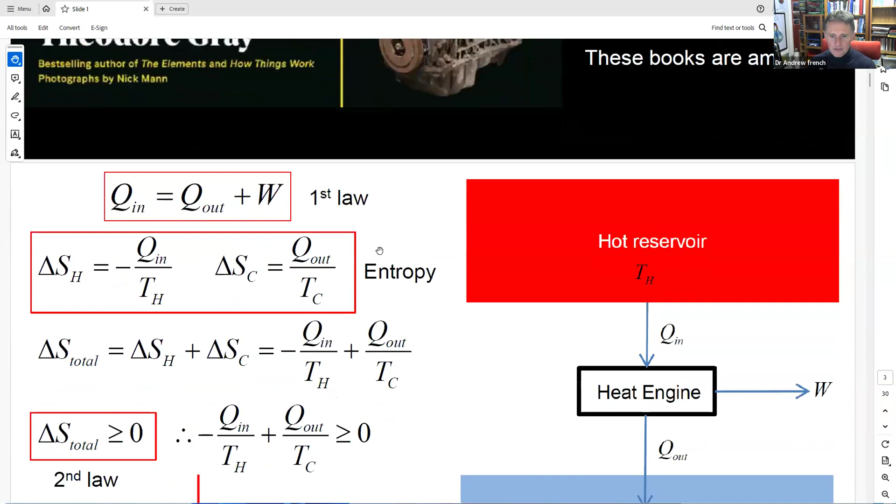Very good. Anyway, so let's have a look about engines. So firstly, some key ideas, and if I can zoom in here, let's have a look. There we go. Right, so we've got this idea of a heat engine. Essentially, pictorially, this is what it looks like. So we've got a reservoir, some sort of large quantity of, well, these days we think about it as jiggling atoms. And if we extract some kinetic energy from that, it doesn't really make a difference to the average kinetic energy of the molecules.

And that's what absolute temperature is. Temperature in Kelvin is proportional to the mean kinetic energy of molecules. That's one of the big ideas that relates thermal stuff to things like mechanics, like half mv squared for kinetic energy. So that's what a reservoir is.

So we've got a hot reservoir somewhere, and then we extract some energy from that, and we do some work, a force times distance moved in direction of force, that kind of thing. And we're going to call that a heat engine.

Now, what is that in practice? It's going to be pistons, it can be all sorts of things, pumps. But before we actually get down to the details of what an engine could be...

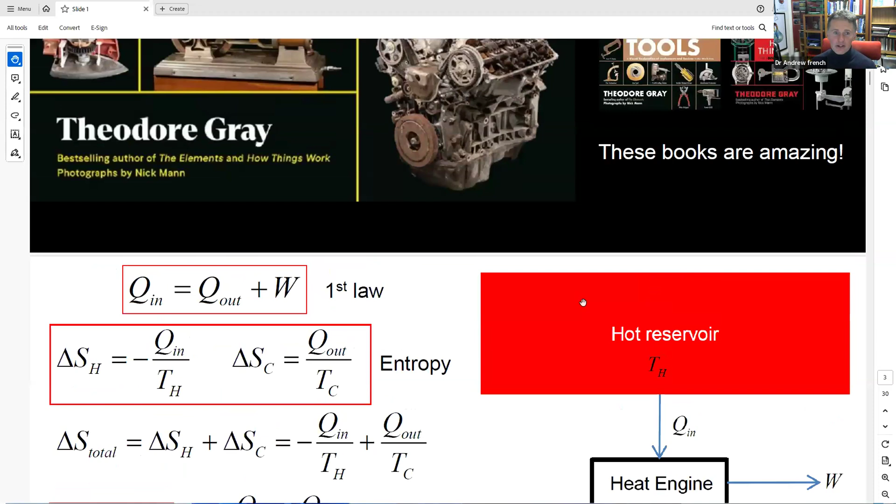These all follow, although they look complicated, similar principles. So basically what we're doing is we're taking some energy from a hot reservoir and we're doing some work with it. Then we are transferring some energy to a cold reservoir at temperature T cold. So T cold is less than T hot.

Now, you may think, wouldn't it be great if all the energy we could extract from the hot reservoir, we could then turn into work. We could extract some energy from burning stuff or however we're generating some energy. But it turns out that's not allowed, right? And the reason is because of the second law of thermodynamics.

So let's talk about some really basic fundamental physics equations here. The first law of thermodynamics, relative to this picture - one of my key nags is that you've got to define your universe. It's like in maths, really, because it is maths. You're saying, let's reduce the world to this simple problem, and the variables I define, I now interact mathematically, and I use those variables and nothing else. This is really why we start with diagrams in all physics problems.

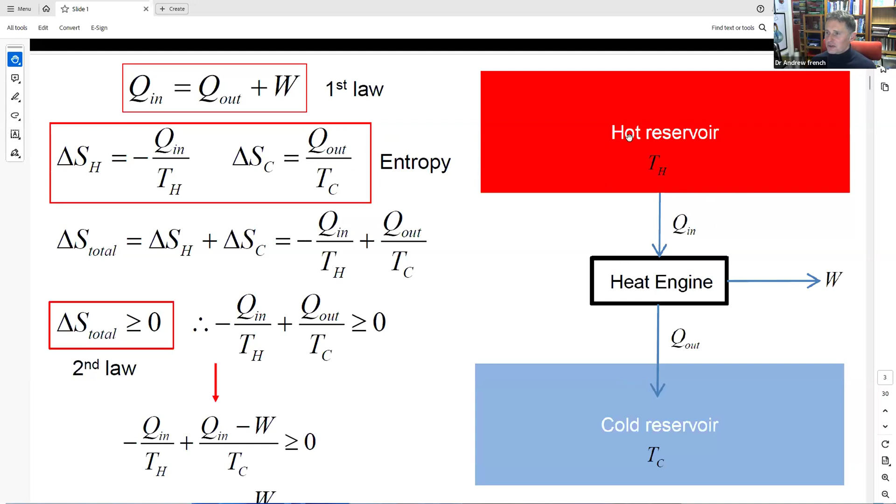So the first law of thermodynamics, that energy is conserved relative to the universe I've defined here, this slightly abstract heat engine universe, means that the input heat, the thermal energy, the total kinetic energy I can extract from my hot reservoir, is equal to the heat that comes out plus W, which is what I'm going to call the work, the useful work done. So that's the first law of thermodynamics.

Okay, now something more interesting perhaps is the second law. Before we talked about the idea that atoms exist and statistics, entropy was defined as a heat change divided by an absolute temperature. So it's important now that that's in Kelvin, not in Celsius, or certainly not in Fahrenheit. 0 Kelvin means 0 kinetic energy.

So we can look at the entropy change of my hot reservoir and the entropy change of my cold reservoir. We're extracting some heat from my hot reservoir, so the entropy change is going to be minus Q in, divided by the temperature of my reservoir. We don't need to sum it up in a calculus way because it's a reservoir - the temperatures don't change when we extract something from it. The amount of heat we take is a measly amount compared to what's available. It's like trying to take a drink from a lake, unless you're very, very thirsty, you're not going to change the lake at all.

So what we can do is work out the total entropy change of my universe, which I've defined to be this system. So if we add those two things up, we've got this little expression here.

Now, the second law of thermodynamics - and I recommend the Flanders and Swann song to explore that, I'm not going to sing that to you, but you can look at that on YouTube - is that the total entropy change for any change you can think of must either be 0 or bigger than 0. It cannot be negative, and that's the whole universe. So you can think of systems, endothermic and exothermic reactions in chemistry, where part of that system might have a negative entropy change, but it only works if the total entropy change is bigger than 0.

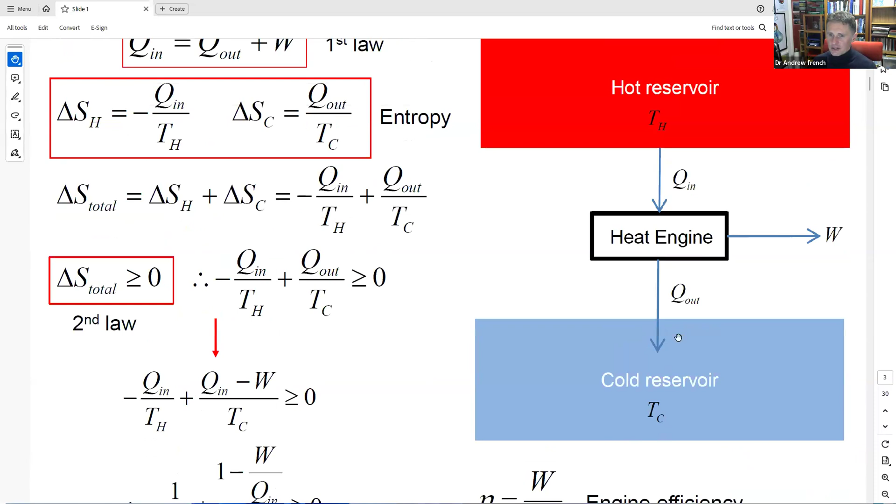But however we do it, we can't actually have eta equal to unity, because there will always be some limit, it won't be infinitely hot and infinitely cold. So isn't that cool? We've just defined this picture, without saying anything about how our heat engine actually works, but by using the first and second law, we can show that this is the maximum efficiency of any heat engine. So the next plan is to look at some real, or realistic, heat engines, and compare them to our maximum efficiency.

If you do a course in thermodynamics, this is not particularly out there. We're going to look at something called a Carnot engine, which is as efficient as it can be, but pretty hard to actually create in real life. But it will give us a template for how we might model a heat engine. Then we'll look at a diesel engine and a petrol engine, which hopefully in your lifetime will go out of favour, but sadly it all still exists these days. Nonetheless, I think it's very instructive for us to analyse it.

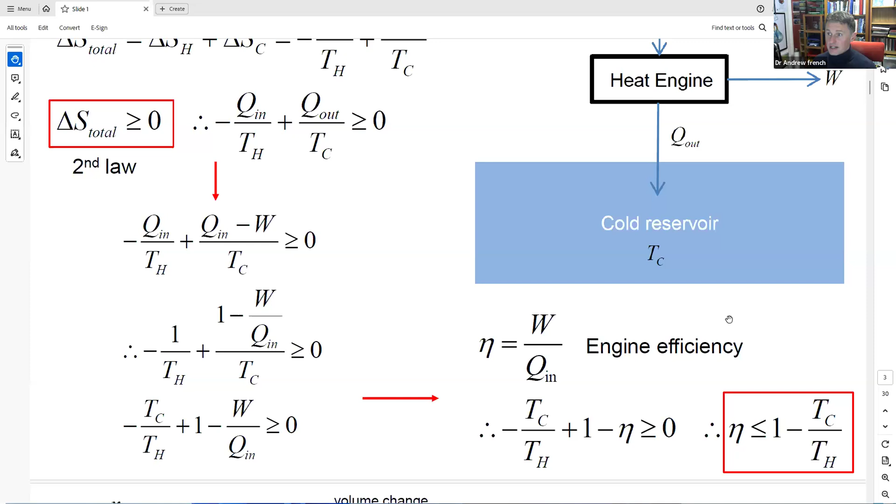Most of global trade is via sea, and that's using diesel, very efficient diesel engines. Maybe we'll have sails in the future, but at the moment it's a diesel engine.

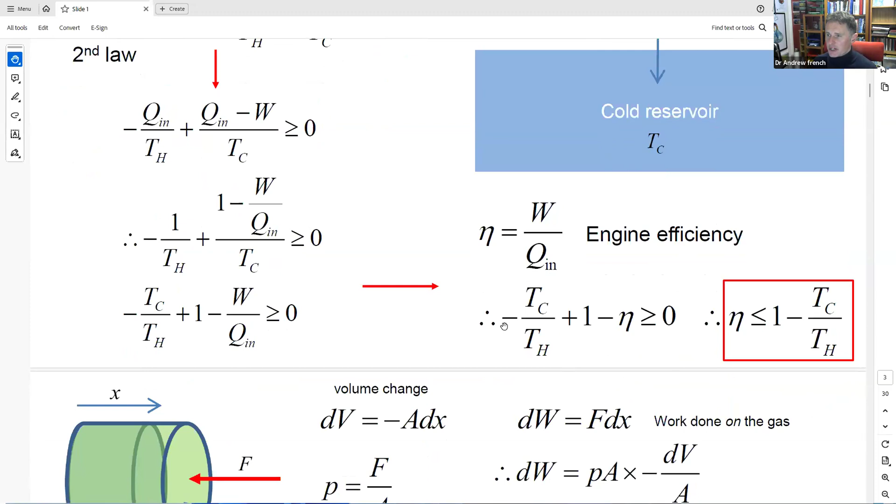So let's look at some of these. There's a bit of detail here, so I think it's important to look at the essentials, and then if you think this is a nice project for you, to code it up. I'm going to give you a tour of how this works, and every heat engine we'll look at will follow a very similar recipe. All the various details I think you could download from this presentation. Have a go yourself.

So let's get the basics first. We talked about work. When we're looking at heat engines, a practical one, we're going to talk about pistons and using gas. So it's a kind of gas model. We are compressing gas, expanding gas, igniting gas, exchanging heat with gases in finite volumes, etc. So let's have a look at how work relates to pressure and volume.

So if we've got some sort of cylinder here, we apply a force to it. My volume change is going to be the surface area, A, of my cylinder, times dx, which is my change in the height of my cylinder, which might contain some gas. So the work done on the gas is the force times a little bit of distance. Mathematicians amongst you, I know I should be using little deltas here, but I'm just going to use the calculus notation because we can make that differentiably small.

It's a small quantity. So now force is going to be the pressure times the area. And my dx will be my volume change divided by the area, because my volume change is going to be the area times dx. I hope that makes sense. So if I put that together, my area is going to cancel, and the amount of work that I do on the gas, not by the gas, on the gas, is minus PdV. So the pressure times the volume change.

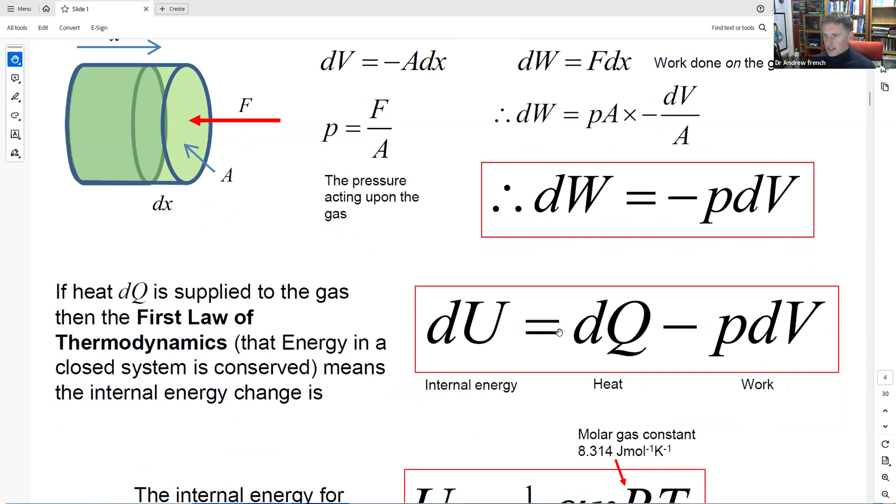Really useful idea, that. And so if we look at the first law applied to this system, if we apply some heat to it, and we do some work on it, what's the change in internal energy of my gas? Well, the heat plus the work done on it. So dQ minus PdV. If you're bothered about the minus sign, remember dV in this case would be negative, so that's like a double negative. So that's the first relationship involving internal energy, heat, and work.

And we can also relate internal energy in terms of absolute temperature. This links to the modern concept of thermodynamics, which is that temperature is related to the mean kinetic energy of molecules. We're kind of glossing over that, because there might be some potential energy too, but if we're talking about ideal gases, we don't really care about the stickiness of the gas - that's the ideal gas model. So this is pure kinetic energy.

What are the constants? Well, this is called the molar gas constant, and that's the number of moles, and then we've got some numbers in front. This might appear strange and mysterious where this comes from - I'm going to leave that story, the details, to some books and resources I can point you towards. But essentially, this is what defines internal energy in terms of temperature. An interesting mystery for you to look at is why there's a half there.

But anyway, if we've got molecules, they can move in X, Y, and Z, so that would normally be 3. But you could have stretching, you could have rotation, so the number of degrees of freedom of molecular motion could be more than 3. But for most gases, the internal energy is 3/2 times number of moles times molar gas constant times the absolute temperature in Kelvin. That's almost a kind of definition of temperature involving the mean kinetic energy of molecules.

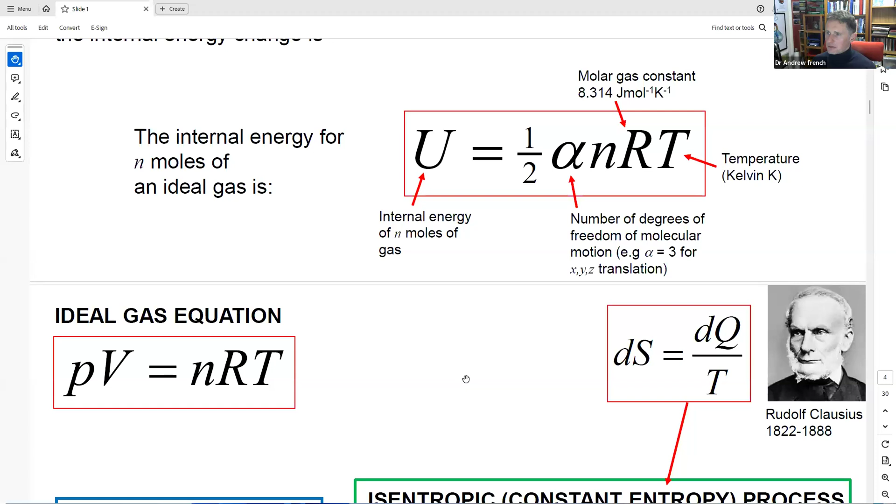All right, so we've got this idea of the ideal gas equation, and lots of you will have met this before: the idea of pressure times volume, number of moles of gas, molar gas constant, and absolute temperature in Kelvin.

So you've got Boyle's law. If you take a cylinder and compress it really slowly, isothermally, so T is the same and it doesn't leak, then PV is a constant. So P is inversely proportional to V. Fantastic experiment if you've not done it.

You could have what I did literally yesterday with my class, where we had a fixed volume of gas and we heated it up. And then we saw that P is proportional to temperature. And if you do it in Celsius, extrapolate it down to work out when P is 0, you'll get minus 273 Celsius corresponding to P is 0, so absolute 0. So you can heat a gas up in a lab and work out the temperature that your gas would stop moving, absolute 0, which is a pretty cool experiment.

So there we go, that's one ingredient. And then we've got Clausius, this is Rudolf Clausius, who defined our entropy, a change in heat divided by the temperature. So when you're looking at some heat cycles, the idea is to look at different processes where some things are constant.

So the first one usually is an isothermal process. This is when T is a constant. All of these processes, we're assuming we're not leaking any gas. We've got the same number of moles of gas that we're using in our cylinders. So for an isothermal process, we can use this equation and the first law of thermodynamics to work out a few things.

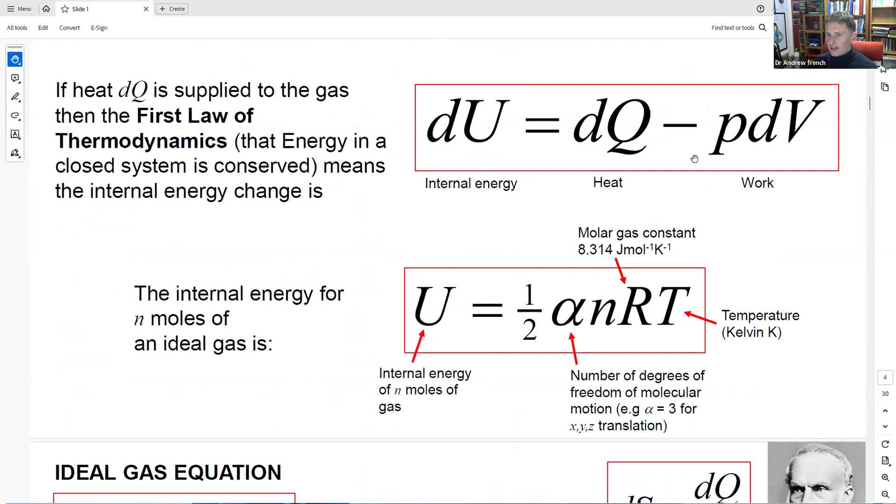And if you work out the heat change, remember it's PdV. If it's isothermal, the internal energy change is 0. So the heat change is going to equal PdV. So if we integrate that up, if P is going as 1/V, you're integrating 1/V with respect to V, which gives you a natural logarithm.

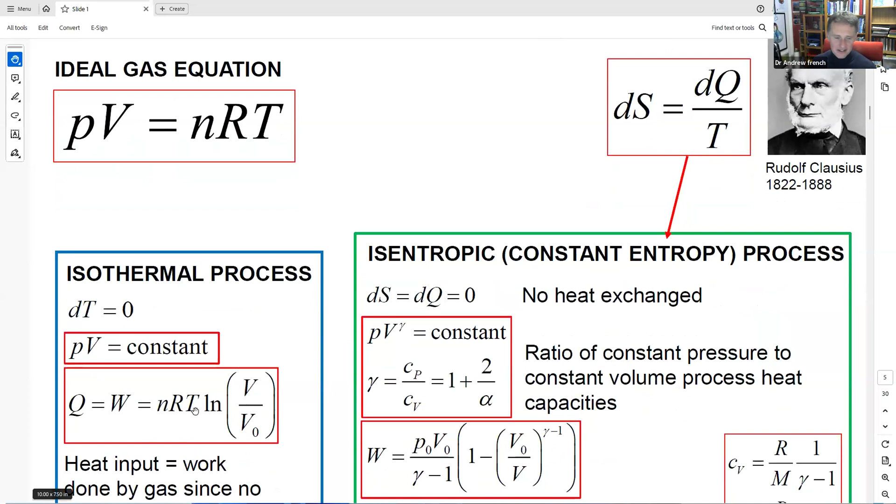Okay, so if you've not done it in maths yet, just take my word for it. But a lot of you hopefully will be nodding sagely that you've probably just done this or did it last year. So you can work out the heat change and of course the work done by the gas. So an isothermal process: we put Q joules in, and W joules is the work done by it, in that particular process.

So you're thinking, hang on a minute, surely this isn't possible, Dr. French, because we're not allowed to break the second law of thermodynamics. Well, the reason is that this is just one part of a heat engine. So overall, we might have a negative entropy change, but over the whole cycle, we will satisfy our second law of thermodynamics. So that's the formula for the heat and the work done, which goes as a natural logarithm as our ratio of our volumes.

We can look at a slightly more interesting one. This is an isentropic process, where entropy change is zero, so no heat is exchanged. That's quite hard to actually achieve in reality, but you can imagine a system where you're maybe expanding a gas, but no heat is added or removed from it. And in this particular case, it turns out you can work out that PV to some constant, gamma, is a constant. So it's not quite the same as PV is constant. And that constant gamma is the ratio of specific heats, which is, you think, heat capacity.

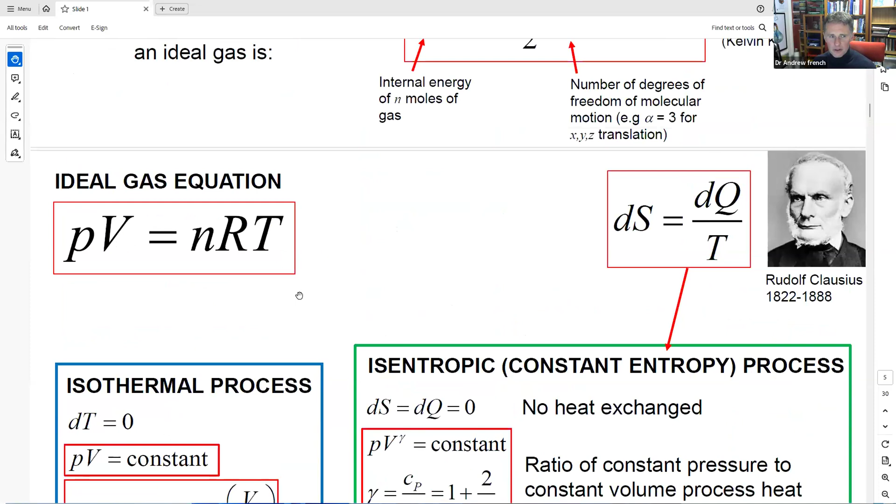So if I add some energy to something and it goes up in temperature, either at constant pressure or volume, the ratio of those constants is what this is. And it turns out it's also related to degrees of freedom. So for molecules bouncing around without any rotational stretch, alpha is 3, so 1 plus 2/3 is that ratio. And if you work it all out, just putting into this equation, there's a little bit of work to do, but you can work out an equation for the work done.

Remember, there's no heat change here. So that's, I would take this at the moment as a recipe book. This is how you work out work done, P versus V.

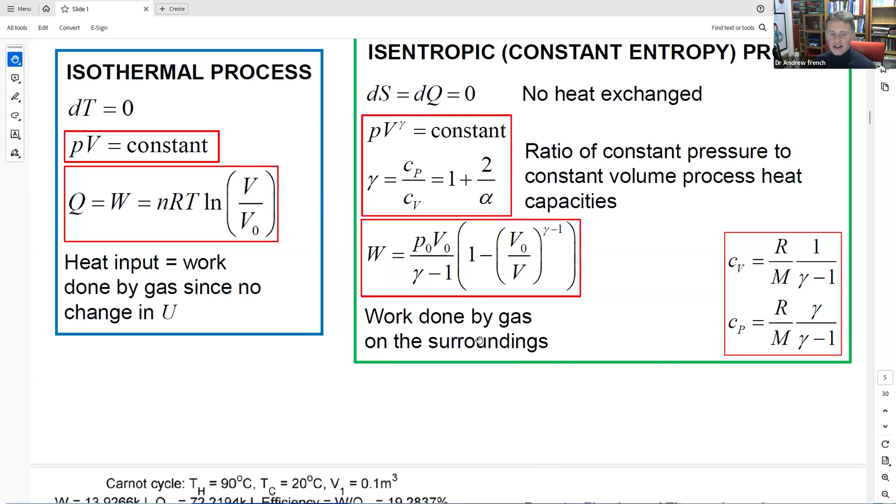Now let's put it together into a model. This is called a Carnot cycle. Let me have a look at this. So this is how I think I'll start it, actually, in a plot that might be strange.

So what we're going to do is we're going to plot, if I make this nice and big so you can just see, and I'll obscure the maths just for the moment. How do I move that out of the way? Right, here we go. Let's make that as big as possible.

So what we're going to do: this is a Carnot cycle, and my hot reservoir is 90 degrees Celsius, so that plus 273 Kelvin. And my cold reservoir is 20 degrees. And I've got a cylinder which is a tenth of a cubic meter, so fairly reasonable, sort of a 100-litre cylinder, something like that. And for this particular cycle, you can calculate that the efficiency is 19.3%, the input heat is 72 kilojoules, and the work done is 13.9 kilojoules.

How have I done this? So the first thing you're going to do is look at temperature versus entropy. This may seem a very bizarre thing to do, but it defines the processes that form our cycle.

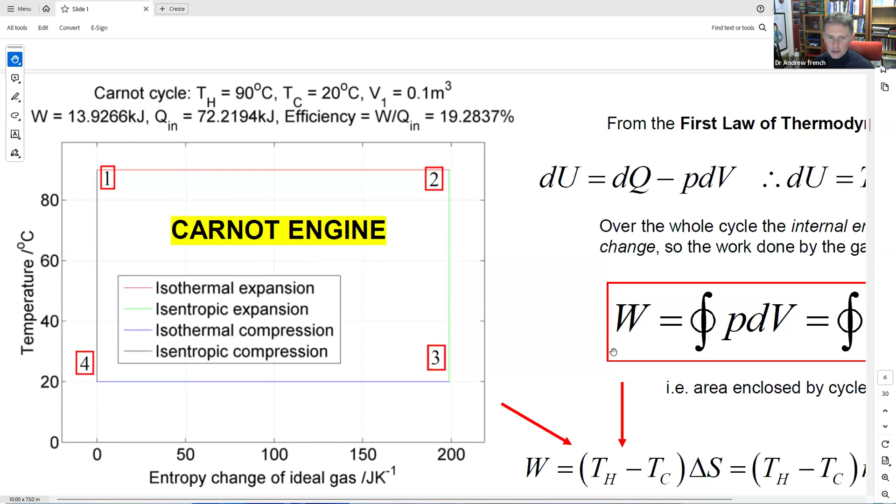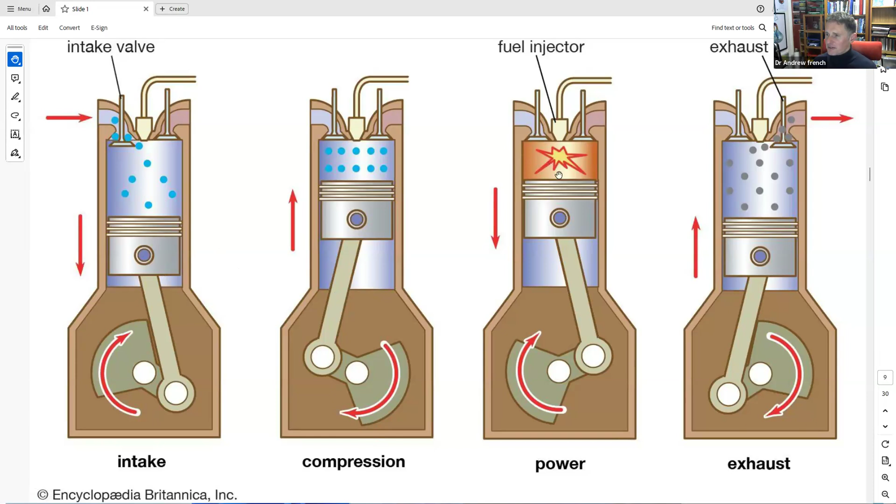So you draw in your intake, you open a valve here, air is sucked in, and then you compress it, and if it's diesel, you can press it enough so it actually ignites and releases heat. If it's petrol, you have to apply an electrical signal to make a spark, which ignites the fuel vapors, and that will release heat and explode.

And then what will happen is you'll do some work - it will expand, do some work, and then you'll actually release your heat here, release your exhaust fumes. You can draw some more air in. So I guess although the number of moles is retained, it's probably not the same moles, because you want to remove your pollutants. But essentially, it's a cyclical process.

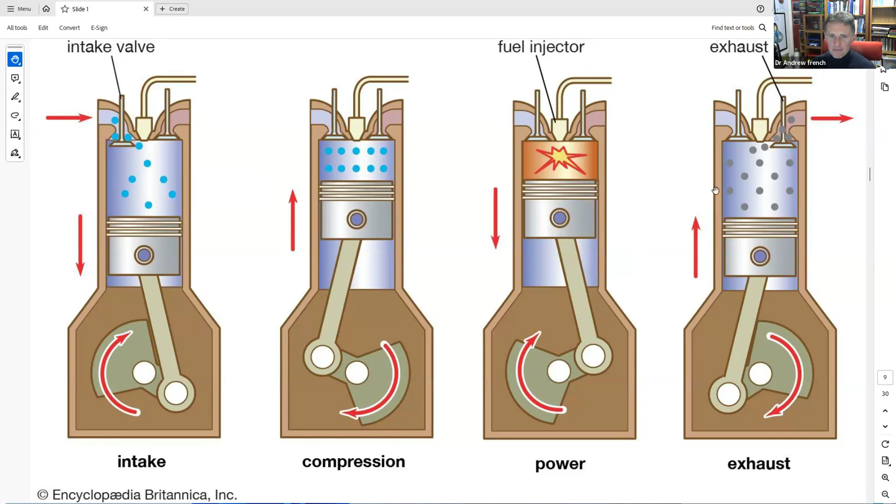This stroke here is where you do work. You're using internal energy of your fuel to push a piston, which will then drive some sort of rod, which will turn a wheel or something like that. So we need a cycle, and what we're going to have a look at is one of those.

So the Carnot engine, which is the most efficient you can do, is where we have 4 processes. The first one is an isothermal expansion. So what does that mean? It means we're expanding a gas at constant temperature.

And in this particular case, we've got a hot gas, at 90 degrees Celsius, and we increase the volume from 1 to 2. Now, then what we're going to do is we are going to expand it a little bit more, but without any heat added.

We call that an isentropic expansion, a constant entropy expansion. Now, if we plot a graph of temperature versus entropy, that's really easy to do, because if you've got isothermal, then we've got horizontal lines. And if you're isentropic, then we've got vertical lines. So without knowing anything complicated, we don't have to do any complicated maths - we could just draw a rectangle.

And so once we get down to point 3, which is now a lower temperature, we've expanded our gas and it's cooled.

So the work done by my gas is paid for, if you like, by the reduction in temperature, internal energy of my gas. And then we can compress it isothermally, and then we compress it isentropically, and then we start again. So how can we work out all these useful things?

If we have a look at the first law of thermodynamics, that's dq minus pdv. So this is where we had it before. Now, dq is the temperature times the entropy change. Remember Clausius's law, so dS is dq over T.

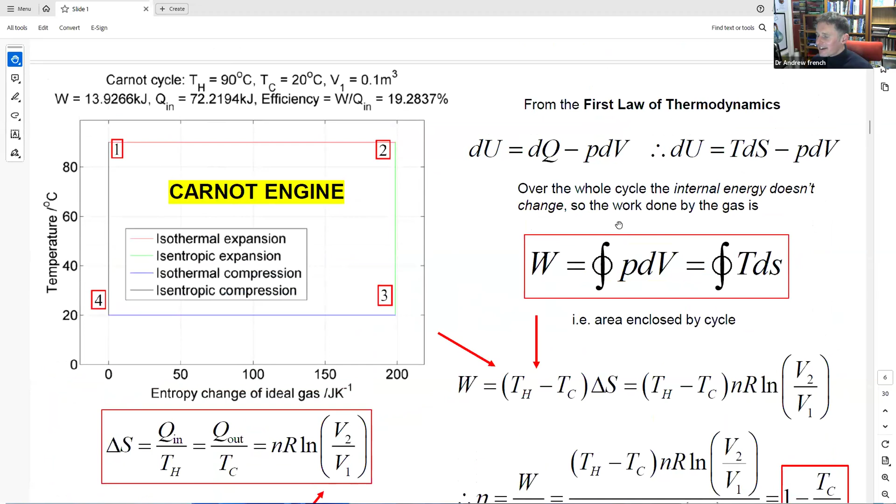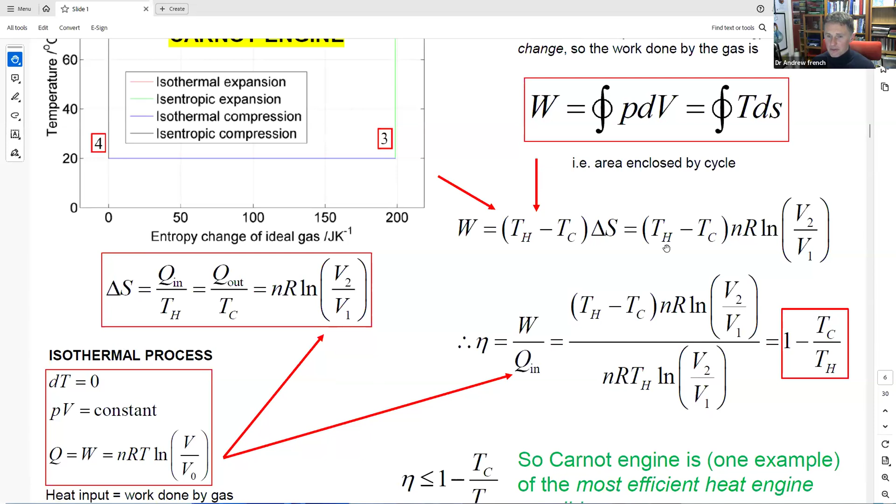Right, so you're thinking, okay, well, in terms of projects, well, firstly, for a Carnot engine, you could plot this up and you could work out the numbers in the title here. So that's working out, well, you know the efficiency, but you could do the energy change here, so essentially this one, and you could work out - so that number we've got there, if we know TH and TC, we know N, we know the volume change, we can work out these.

All right, so let's have a little look at what we might do in terms of pressure and volume. So this is what, in practice, because entropy is rather an abstract thing, this is what the Carnot cycle actually looks like. So there we are.

That's the rather dishy Nicolas Léonard Sadi Carnot in his military uniform there, 1796 to 1832, and I think we credit him for working this out. So what are we plotting? Because it's quite busy, this picture, so let's work our way through. So what we've got is the same process, exactly the same numbers, but we're starting off at a certain pressure.

Okay, so what's kind of hidden from this, and perhaps I should have in my title, I need to start off with what that pressure is. So I'm starting off at, say, just over 10 atmospheres, something like that. What I'm going to do is go all the way down, so that the graphic shows pressure versus volume. I'm plotting this as volume divided by the initial gas volume. We need to keep track of what our inputs are and what we can calculate.

So this red line is an isothermal expansion, constant temperature. And in order to get it to expand, we've got to put some heat in. The heat input basically increases - if we expand it isothermally, our internal energy must remain the same. So basically heat input accounts for all the work done in expanding this thing.

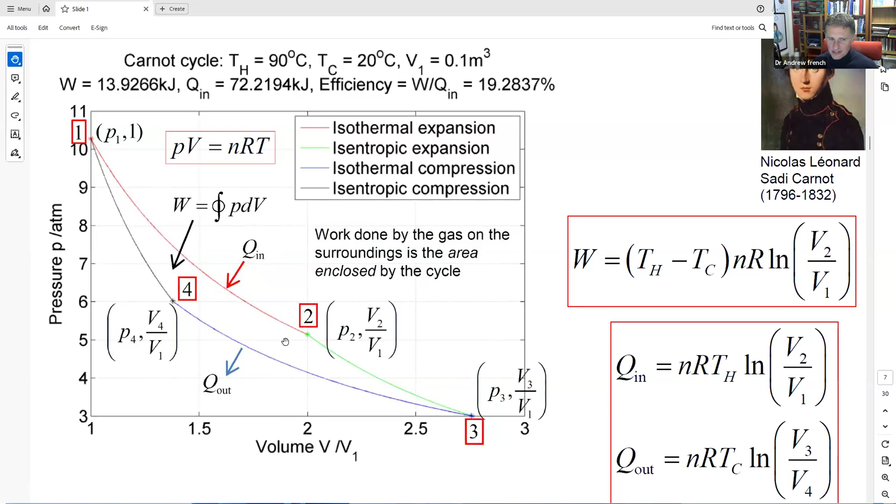So the idea is you want to work out what the pressures are, what the volumes are at all these points, and we've already calculated the heat exchanged and the work done, which is the area under this. That's quite nice, because that sounds like a horrible thing to work out, what the area under this sort of shape is. So that's why plotting it in temperature versus entropy space is a much better idea.

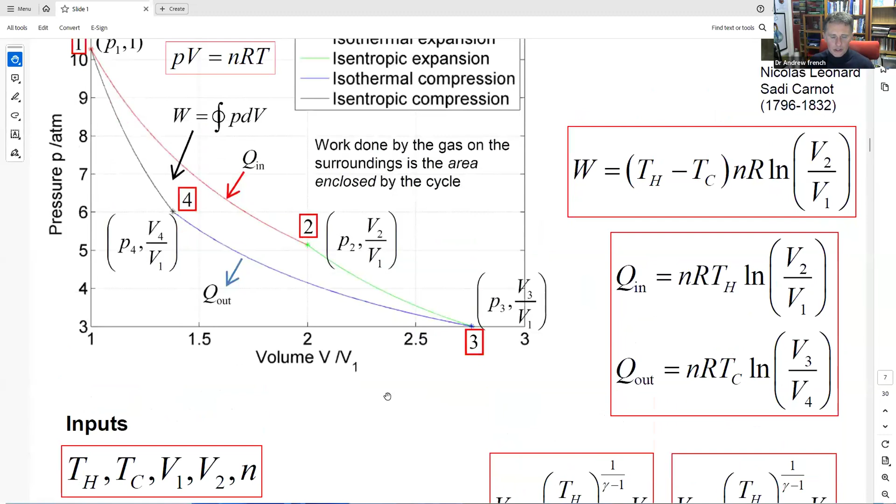Okay, so there we go. Let's look at our inputs and how we might plot this. So our inputs are going to be the reservoir temperatures, T hot and T cold. We need the original volume, and we also need volume 2 - so this volume here, our kind of compression ratio. We also need the moles of gas.

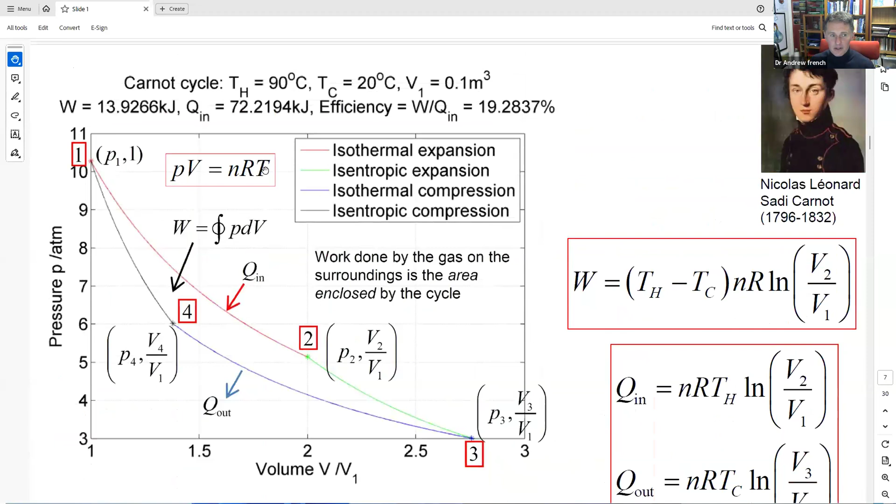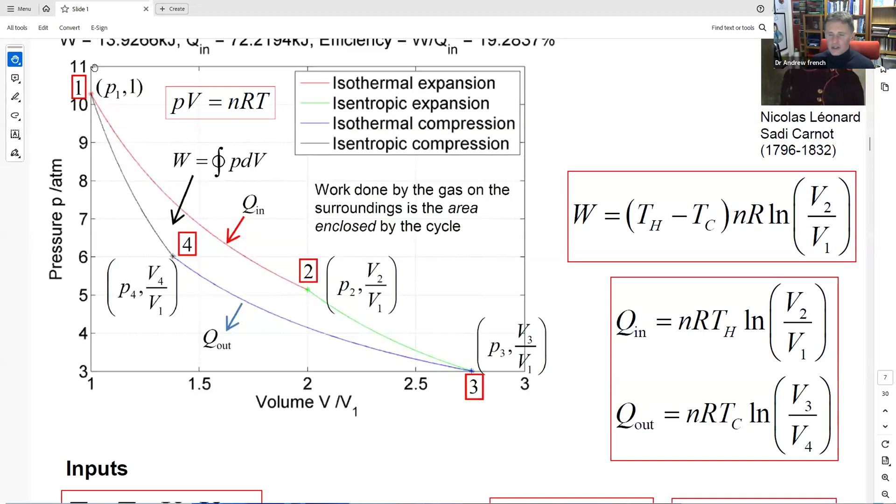So if we know all of those, in fact, we actually don't even need to work out the pressure in that case, because PV equals nRT. If we know the temperature, we know the number of moles of gas, and we know the volume V1, we can work out P1 is nRT1 over V1. So we're using the ideal gas equation at all of these points to figure out everything else.

And then for our various processes, this is something we want to derive, but you can work out volume 4 in terms of volume 1. That's just combining all our equations together, the ideal gas equation and our isentropic PV to the gamma as a constant. So that's for you to do in slow time.

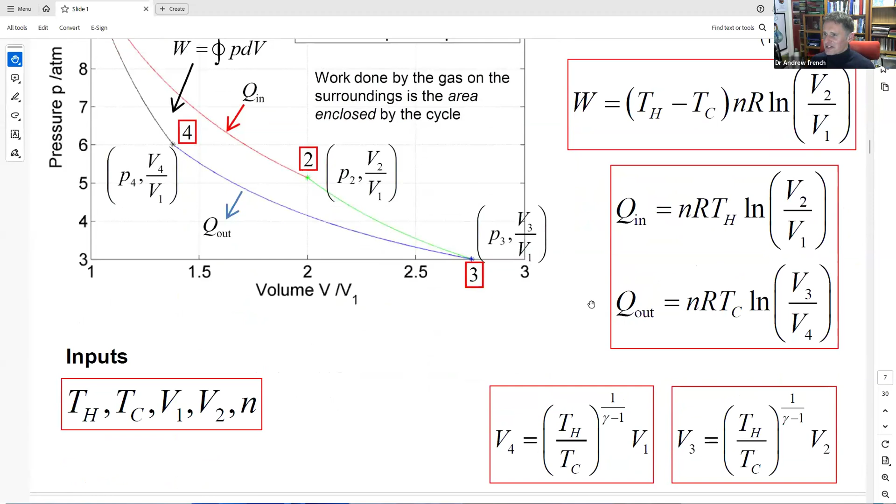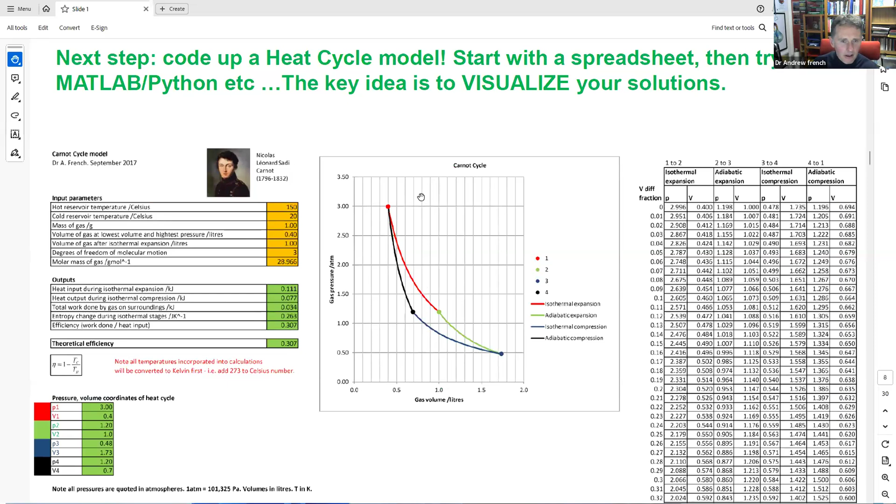But ultimately, this is a recipe, so what we could do is maybe code this up. So here's an Excel sheet - I think you can download this in the Eclecticon, but it's worth having a go yourself. So this is a Carnot cycle, and this graph, I think we'll just deal with this one at the moment - this graph will move as you change your inputs.

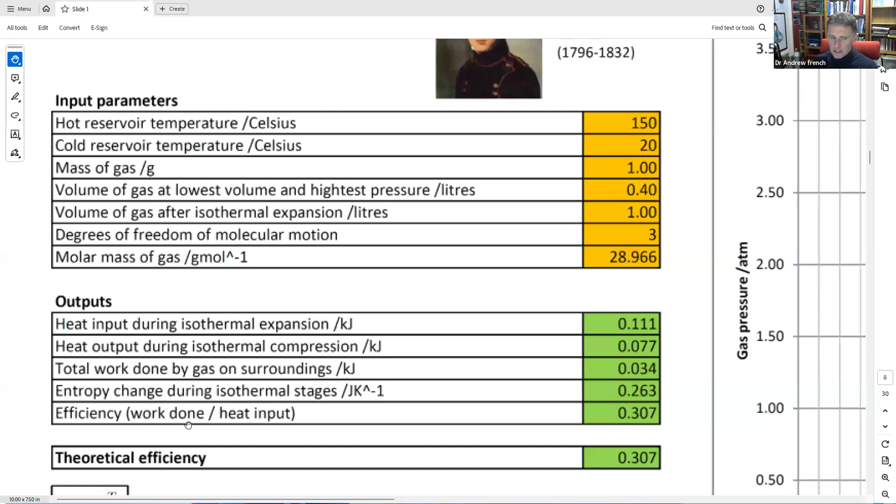So what do we got? Is that big enough to see? So here we go, here are my inputs - hot reservoir, cold reservoir. I've got the mass of gas, and I've worked out what the number of moles is basically from that. I've got the volume of gas in litres, so V1 and V2. I've got the number of degrees of freedom, the molar mass of gas, and then I've worked out - these are all calculated in kilojoules - my heat input, output, work done, entropy change, etc., and efficiency. So this is about 30% efficient, something like that.

Okay, and how have I plotted the graphs? Well, what I've got is all the 4 stages. I don't know if you can see this nice and big - there's a nice technique here which I want to show you.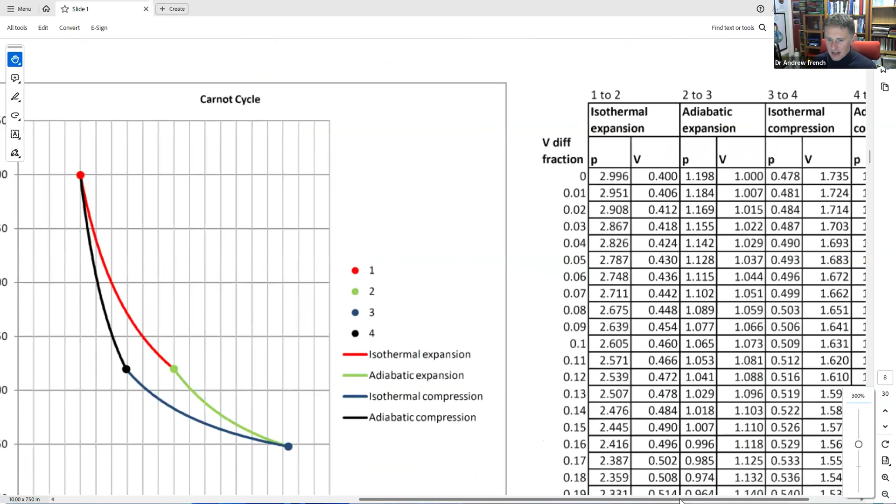So if you want to plot a graph of something that varies, rather than having an increment of volume or pressure, what I'm doing here is I've got a fraction from 0 to 1, in 100 steps of 0.01. So that's my volume fraction, and that defines my range. These volumes go from V1 to V2, V2 to V3, V4 to V1, etc.

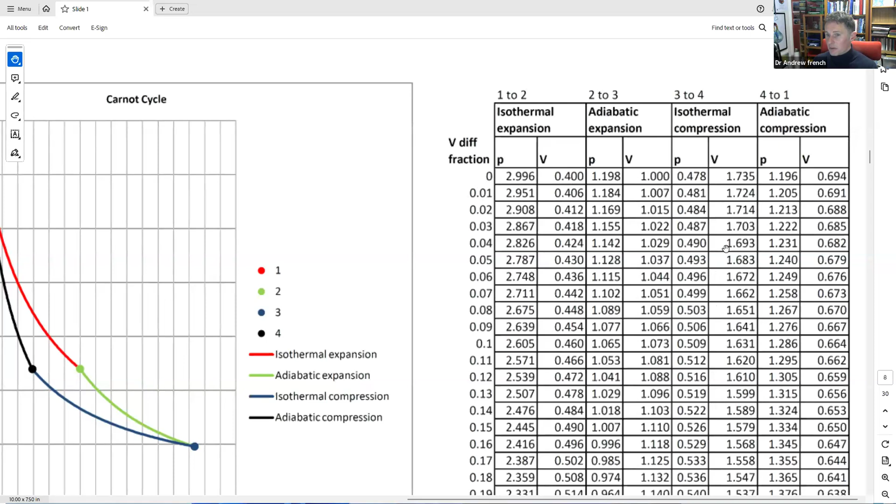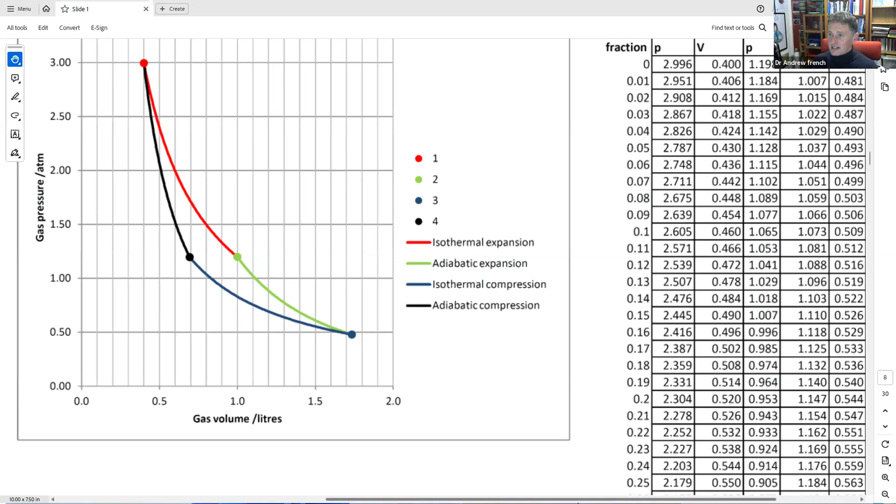So I'm working out my volumes, the coordinates of each of these points. Then I can use my graph to work out a linearly spaced vector of my volumes from here to here, and use the ideal gas equation to work out my pressures. That would be a really nice thing to do. If you've done this for the first time, you might make a mistake and scratch your head, but it's really rewarding to get the whole cycle to work.

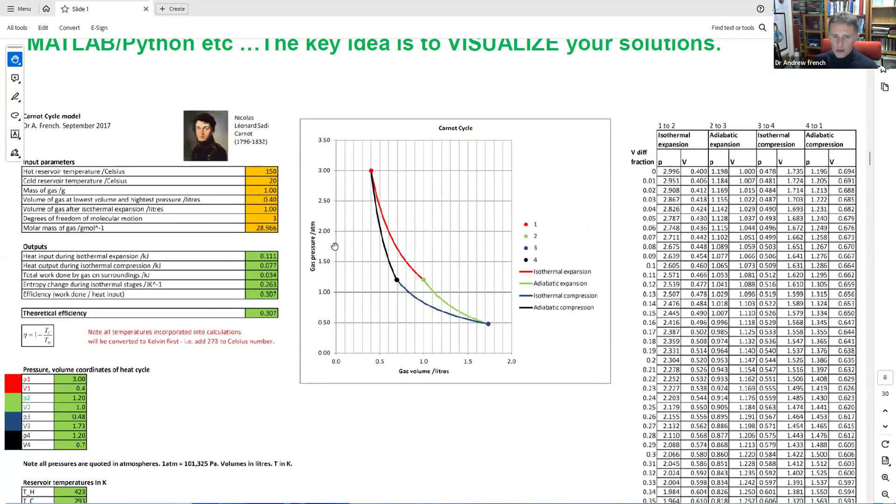I probably start in Excel because this is the structure, and everything is all there. You can see you've got P versus V for your different sections, and you're working out the coordinates from here. There we go, those are my coordinates of P1, V1, etc. Everything is all there, and you can use color - I like using color to define inputs and differentiate those outputs.

And if that's pretty good, then you can do it in Python or MATLAB or something like this. So anyway, that's a really nice project which I'd recommend.

So any questions before we move on? Because I'm going to talk about some other types of engines now. Any questions, Kidman?

Is there an efficient way to input those values into the table?

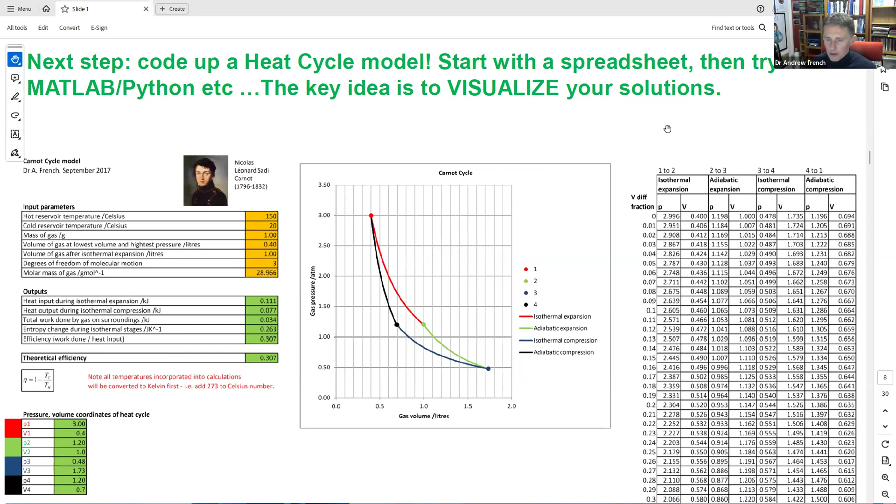Right, so are we talking about the big one on the right-hand side, or the little one here? I think it might be the big one. Okay, I think if I can find the simulation itself, then we can answer that question more accurately. So let's have a look.

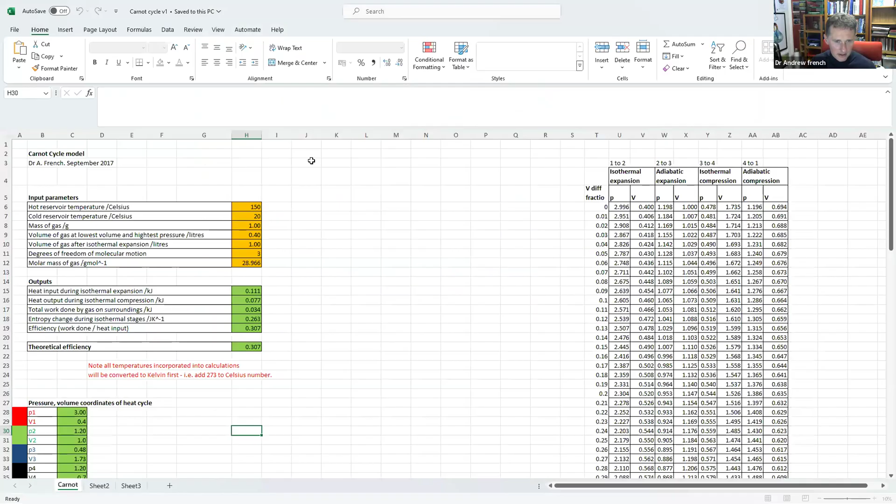Physics - I'm going to delve into my computer now. Let's go for thermodynamics, let's go for simulations, let's go for heat cycles. Carnot cycle, here we go. Let's see if it's this one. Yeah, that looks about right. Okay, so this might be hard to see because I'm going to have to click in the corner here. So what I've got is, there we go.

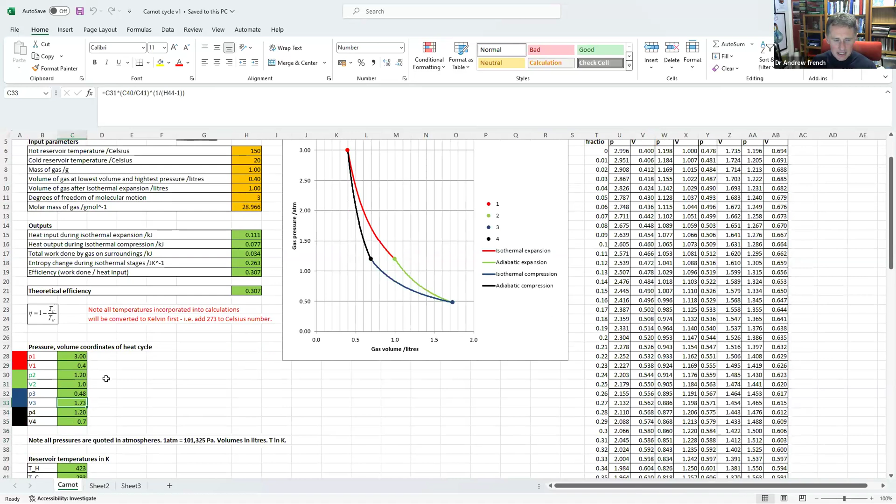So in this big table here, my volume starts off at C29, this one. So what I do is I work out my pressures and volumes of all my coordinates at this point, 1, 2, 3, 4. These are quite hard to read because it's Excel speak, but basically the equations which I say in the recipe work out these points.

And then what I do is I have my volume, so my pressure is using the ideal gas equation, and my volume goes from V1 all the way to V2. So if I click in this cell, it's got the first one, C29, which is V1, plus T8, which is the fraction of the V1 to V2 change, times V2 minus V1. So what we're doing is this thing here is the fraction of the change between V1 and V2, or V2 and V3, or V4 and V1, and we're adding that to the start.

So it's what we call linearly spaced - if you plot it on a graph, this would be a linearly spaced change between the two. So 0.4 is that one, V2 is 1, so if I scroll all the way down, you'll see that's 1 at the bottom. All right, so I never need to change this table, and the secret is doing this little fraction here.

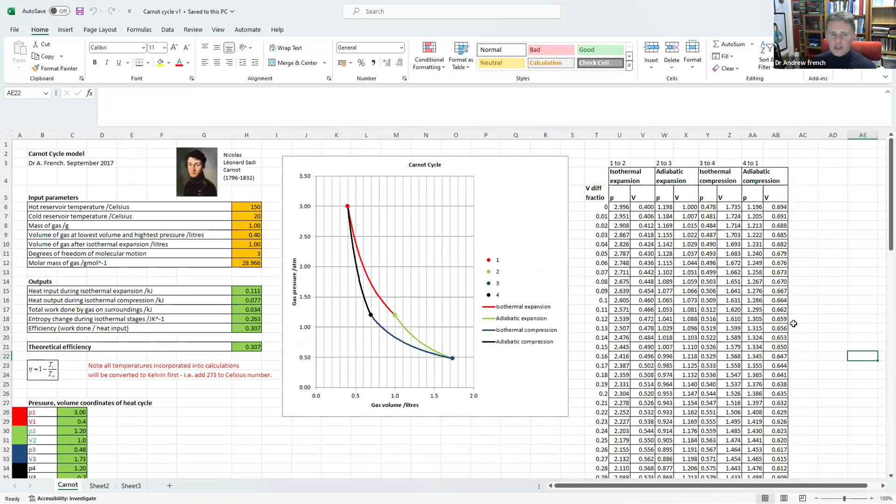I wonder if maybe I could do a very simple example, if that's too complicated. So if I make a new Excel sheet... let's say we're going to plot, let's have an example now. Let's have a fraction, 0, equals the previous cell plus 0.1, so I'm going to go for 10 steps. Let's make this nice and big so we can all see. All right, so there we go. Now let's just say I'm going to define some sort of length, and what I want to do is plot y versus x squared over that length. So let's have a look.

Let's call my width, my a, equal to 10 for example. So my x values go all the way from 0 to whatever this happens to be. If my x values are this one multiplied by whatever this cell is, let's give it a letter, call it A. So I've got that cell there, and this is going to be my fraction times A. If I drag that down in Excel, whatever that is, let's call that 12, I go from 0 to 12. Let's call that 7, I've got 0 to 7.

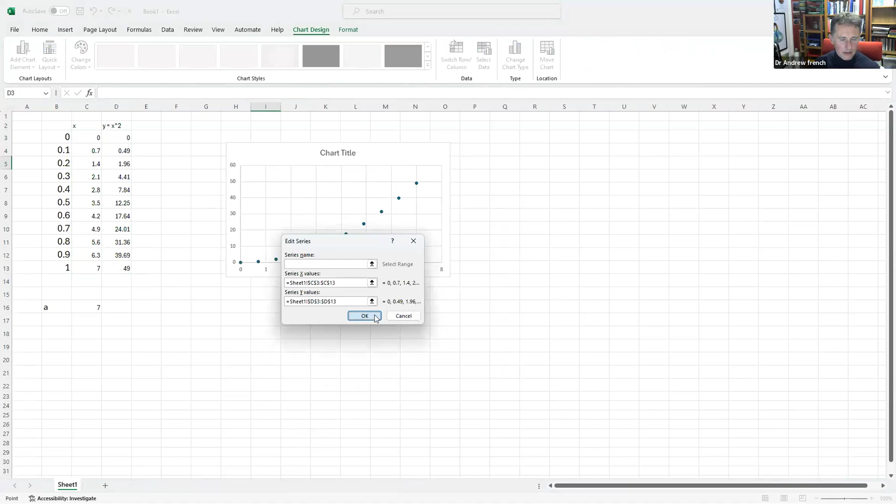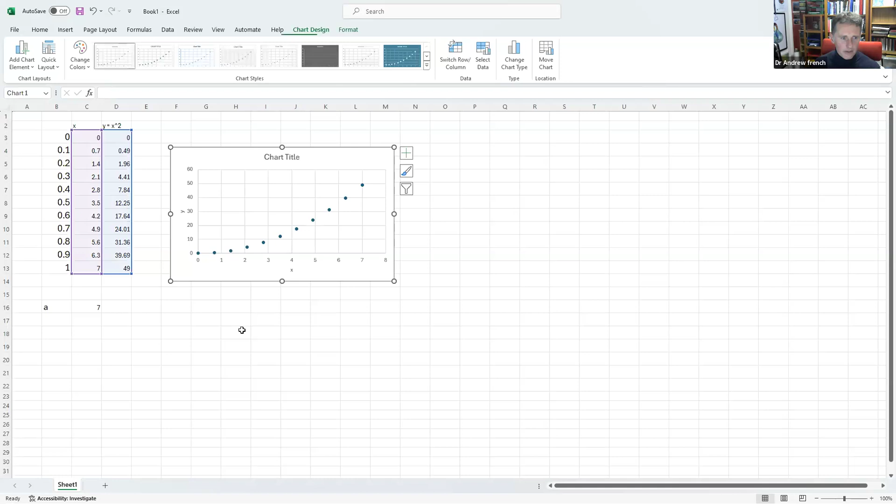Let's put some axes titles, let's go for y. The point is that if we change this, then that will change my graph - 100, there you go. So it's a really nice sort of paradigm. I'm just going to gloss over a few of these little things. So that's a Carnot cycle.

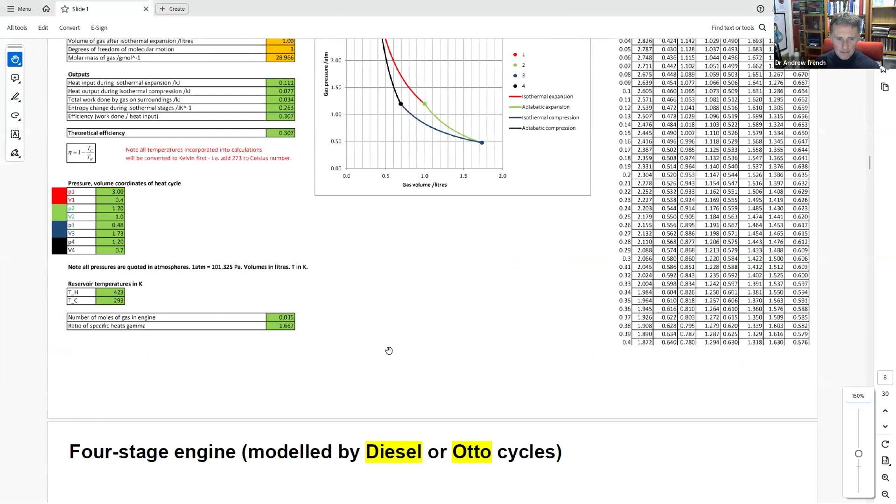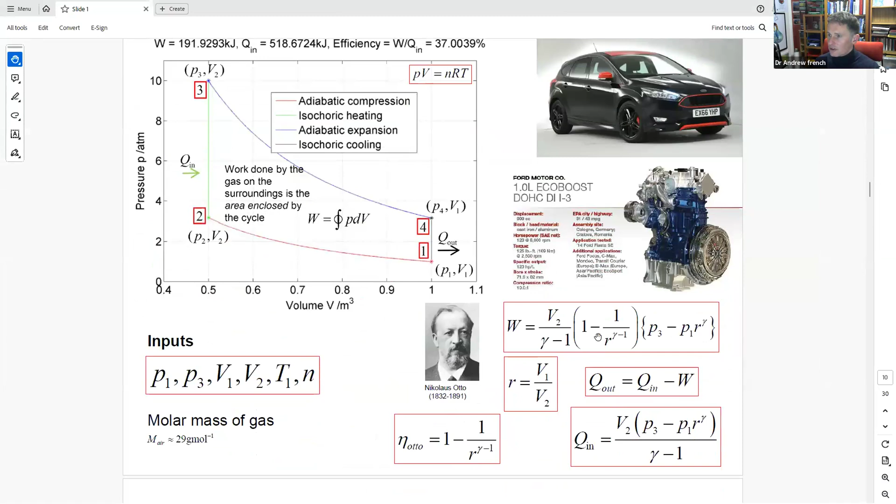Let's have a look at how you might do an Otto cycle. This is for a petrol engine, here's a little sort of Ford engine here. It's a bit more complicated, this, but it's the same idea. I think what we'll do is we won't talk about the actual maths - you can use that for your recipe. Let's just see if we can understand the graph.

An Otto cycle is where we basically take something in at atmospheric pressure, we compress it adiabatically - it's the same as isentropically, so without any heat change. And then what we do is we increase the pressure by adding heat at constant volume. That's quite a different process. This is more like what happens when you basically put a spark into some fuel, that goes from position 2 to 3. So it increases in pressure rapidly without changing much in volume over a very short timescale.

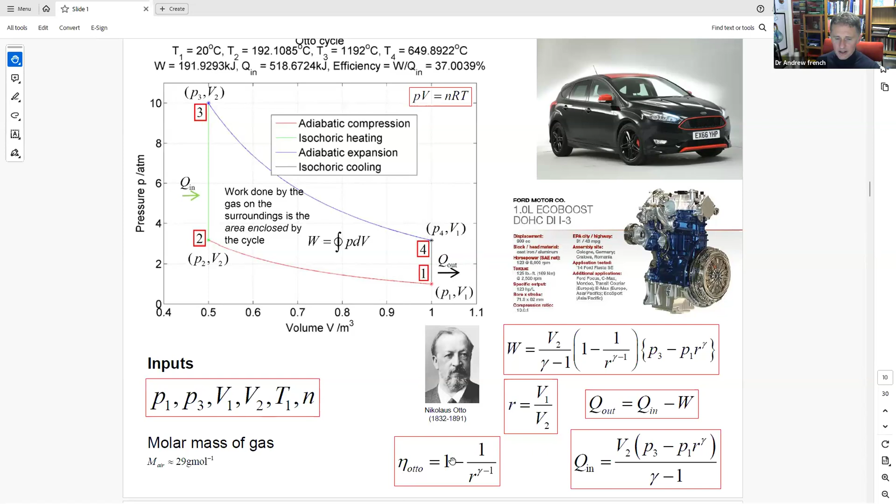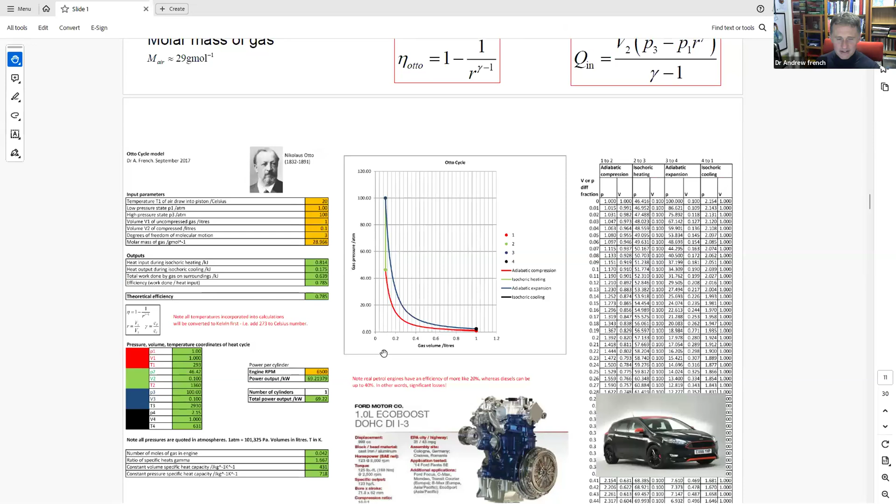So that's not a bad model for how a petrol engine works. And then what you do is you get it to expand and push your piston without any heat exchange. And then you basically take it down at constant volume again by releasing your fuel, and then that will be you're dumping your heat. So the area enclosed by this graph is the work done. And if you work it all out, you can look at the efficiency, which is interesting - it's 1 minus 1 over the ratio of your volumes to this sort of power here. So you can make a little Excel sheet, very similar.

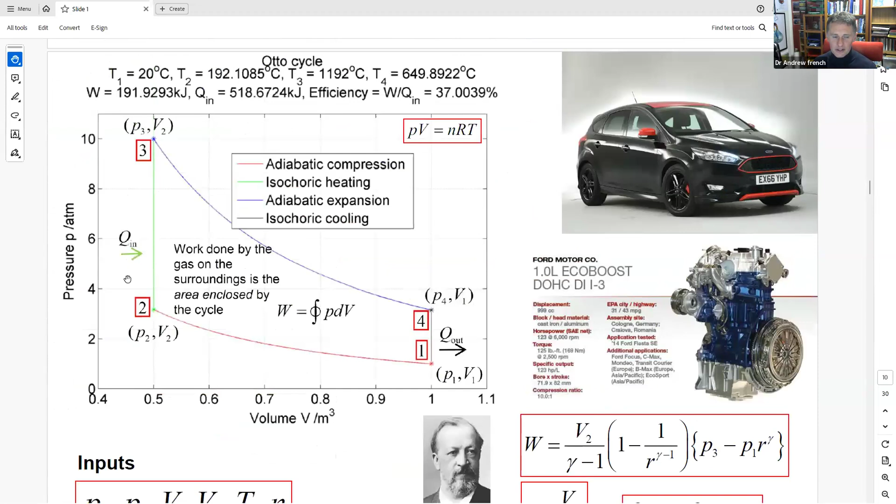So it's huge. A diesel engine works in a slightly different way. What you do is you take things in here and compress it adiabatically, i.e. with no heat exchange. But now we expand it, so we add some heat, or rather the heat is released from your compressed fuel, and you increase in volume at constant pressure - it's what we call an isobaric process. That's different from our Otto cycle, where we sort of increase in pressure but not in volume. So again, this is not really exactly what happens in reality, but it's not a bad model. And the difference is your heavy fuels for your diesel - you're not having to add a spark, it will, if you compress it enough, it will combust. And there we go.

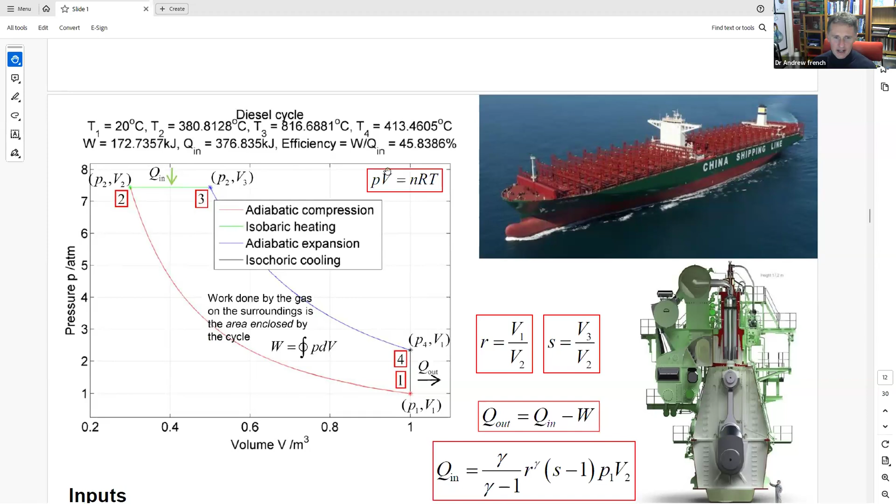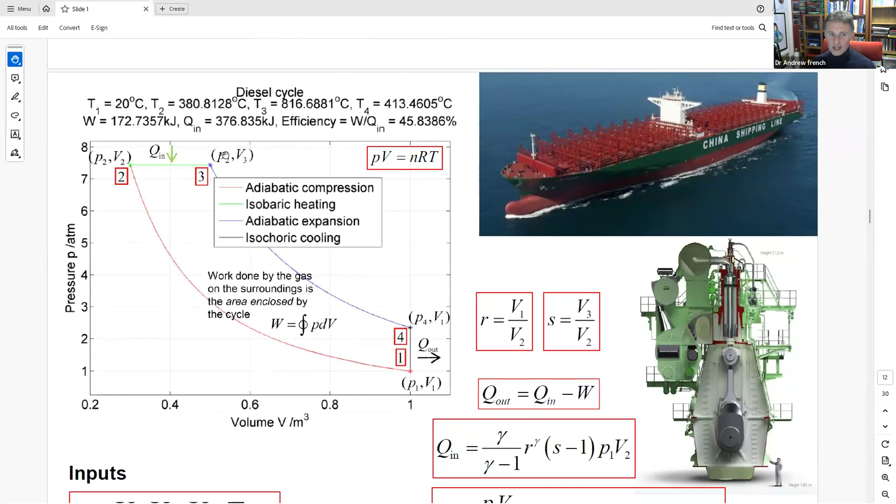So we're going to work out the work done. We need to work out what these curves are, using the ideal gas equation. The actual derivation of the work done is a bit more involved for a diesel cycle, but essentially it's the same process. Here are some models of heat engines: a Carnot, a diesel, and an Otto cycle. There are lots of others you can look up online, but essentially it's the same process of working out what these curves are.

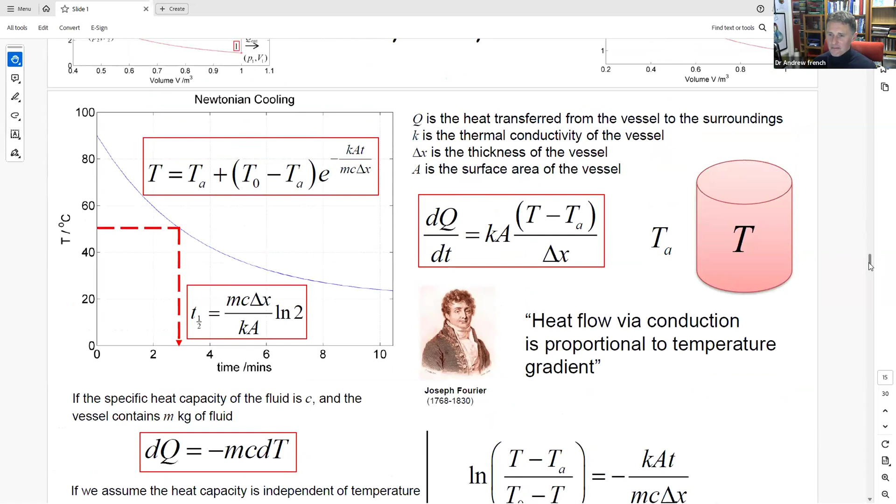I'd like to talk very briefly about the random nature of heat flow. This is what you'll learn in school about the random jiggling of molecules. This is Robert Brown, 1773 to 1858, and there are loads of nice simulations.

The best one I've seen is done with the IOP, I think. You have a big cylinder where you put some ping pong balls, representing the air molecules, and a big slightly flaccid balloon with water representing a smoke particle, which you look at under a microscope. The idea is that the smoke particle jiggles around randomly because it's jostled by the smaller particles you can't see.

So Robert Brown was looking at pollen grains. You might do it looking at a smoke cell under a microscope. The idea is it's sort of random motion.

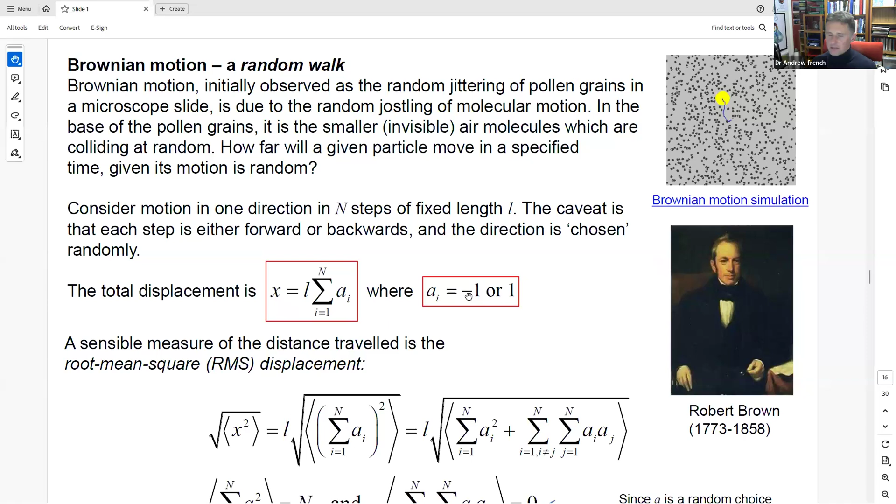You can think about one of the models of molecular motion as a random walk. You might want to start not in 2 dimensions, but 1. Say I can make a step forward or backwards, with step size L, moving backwards or forwards completely randomly. My total displacement is the sum of a random string of -1s and 1s. What you might want to work out is the root mean squared displacement: how far do I go?

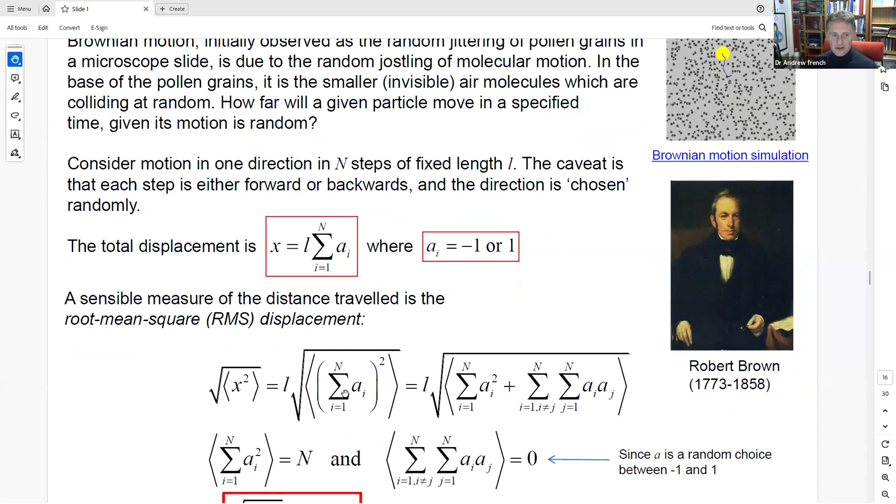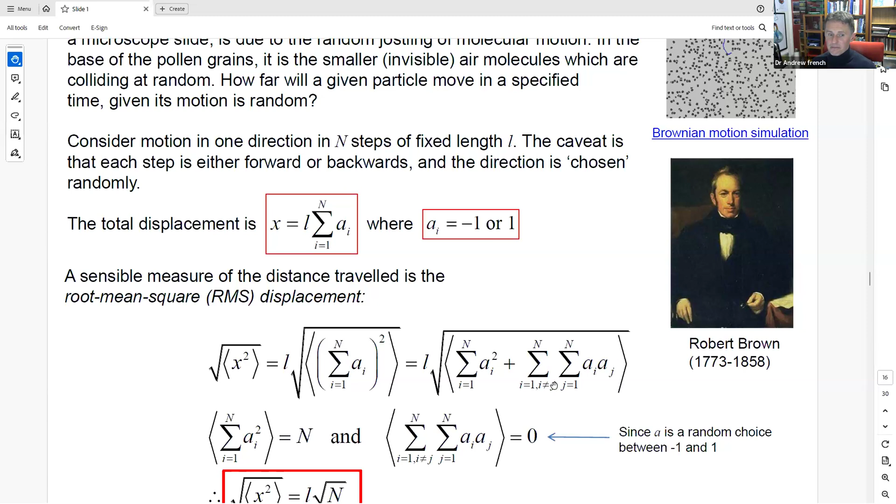The notation might look scary, but it isn't really, it's just a sum. We square this quantity and then square root it, which gives an idea of how far we've gone, since we might have negatives and positives. If you expand that out, you get the squares of all the terms plus cross terms. Because there are likely as many negatives as positives, all that cross term stuff becomes zero. So the sum of all these terms is just the number n. That means our root mean squared distance is predicted to be the step size L times the square root of the number of steps.

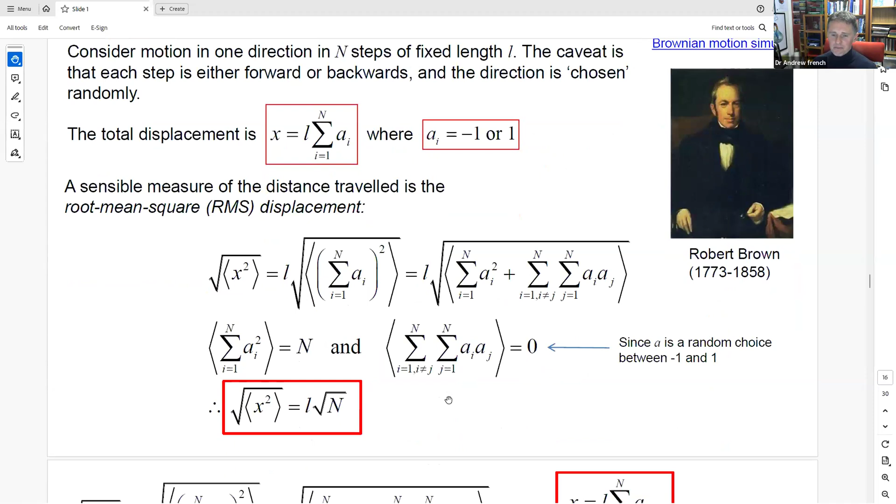That's quite interesting - so why does the square root come from this? I've got a little simulation, and you can relate that to molecular speeds as well. Let's have a look. Your step size could be thought of as the mean free path - how far do you move in a gas before you hit something?

Here's a little simulation I've done in Excel, run over thousands and thousands of steps. Although it's quite a jiggly line, this follows the square root of n, with the step number on the other axis. And if you average over many iterations, it follows it very nicely.

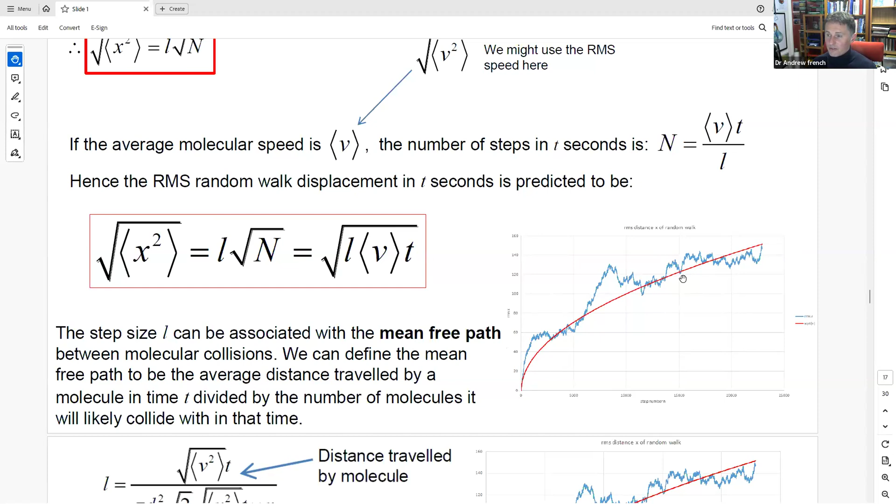I've got a little simulation here - let's skip that for the moment, let's skip that one. Let's go to the Excel sheet, there's quite a few things you want to look at. So what I've done here is set the step size.

This is the square root of n. I've got, say, 12 random walks happening simultaneously. If you notice, I've got 1s or -1s here, and I'm cumulatively adding them up - 0, 1, 2, 3, etc. Some of them are negative. If we work out the root mean squared, so I square x and average all of these, what I end up with is this little curve. The higher the number, the closer I'll get to this ideal.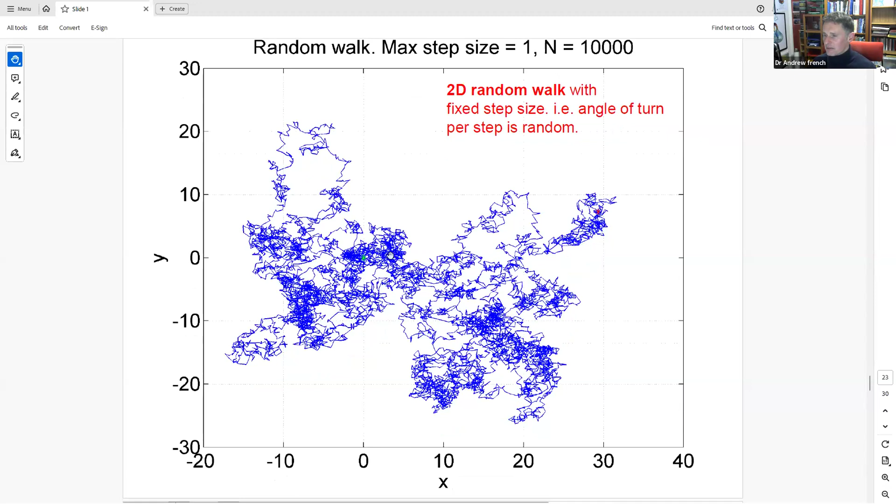Let's have my step size be 1. I'm going to initialize a big old vector - think about it like a column in Excel. Then what I'm going to do is step through that and work out what happens next. So this is my loop. I'm going to loop around 1,000,000 minus 1 times, and that will happen very, very fast.

So I'm going to find an angle this time because it's 2D, and it's going to be any direction I like. So rand is a number between 0 and 1, and anywhere between 0 and 2 pi radians is going to be my angle. So you can imagine I've made a step and I've spun a compass randomly. I'm going to go that direction.

So then what I do - S cos theta is my x displacement, and S sine theta, if you think about drawing that, is my y displacement. I'm going to add that to my previous x and y value. That starts off everyone at zero, and I'm going to work out what the next x and y value is as I go through. That's basically all your simulation needs.

And then I've just got some plot commands to make this picture here. So that's quite pretty, and I've got something that prints it out. That's a really quick thing to plot - it will take you 5 minutes if you know the language, a bit longer if you need to look it up. You can use matplotlib in Python.

Webinars are directed for anyone who's interested, sort of year 12 and year 13. For GCSE and AS competitions, we run several - some online ones, some multiple choice ones, and we also run paper ones. If you look at the BPHO website, www.bpho.org.uk, that's an entire listing of the various competitions that we run. Now, you can't enter them individually. You can only enter them via your school. So your teachers will need to register you, and then you can take the competitions once you've been registered.

How do you find the grade boundaries? That's not immediately obvious because we don't publish them in general. If you're interested in a particular year, we might be able to dig that out, so do email us if you are interested in particular. In general, we don't publish the grade boundaries. Well, we do publish them - they're sent as a report out to teachers, but we don't list all these things. It's just not really all that useful to you. The competition's over and done with, and it depends upon the cohort who take part, so a different year would have slightly different grade boundaries. So really, you just practice on past papers. That's the key thing, to stop worrying about marks.